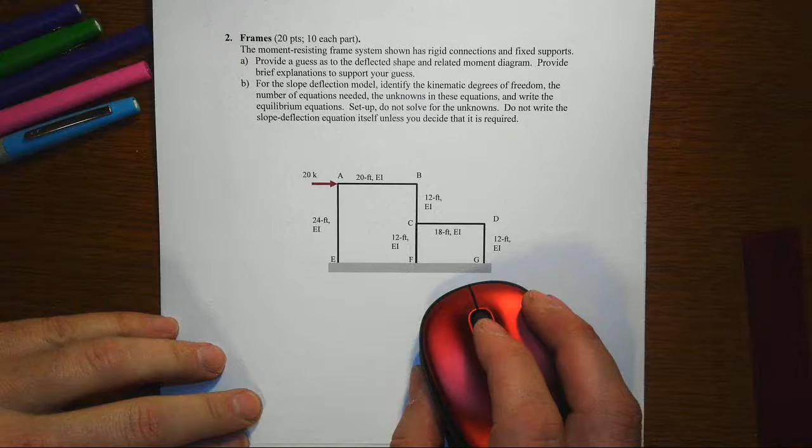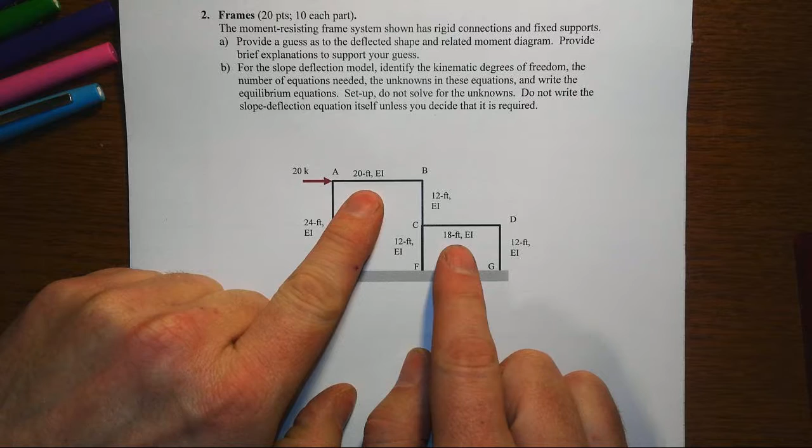In this item we've got a two-bay frame, but the stories are not the same height. We also notice that the beams are not at the same length, although they are the same EI, and the columns, of course, are of varying lengths. It turns out that the right half is about half of the left half panel here.

We get a lateral load of 20 kips, right? We have a moment resisting frame system, so all connections are rigid, and we do have fixed supports.

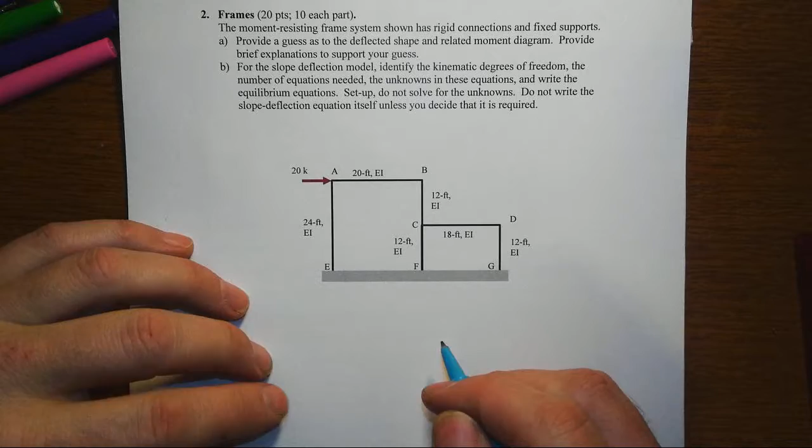We're asked to provide a guess as to the deflected shape and the related moment diagram, and provide brief explanations to support our guess. So let's start with the notion that as I push this frame to the right, the whole thing is going to want to sway to the right. That only makes sense.

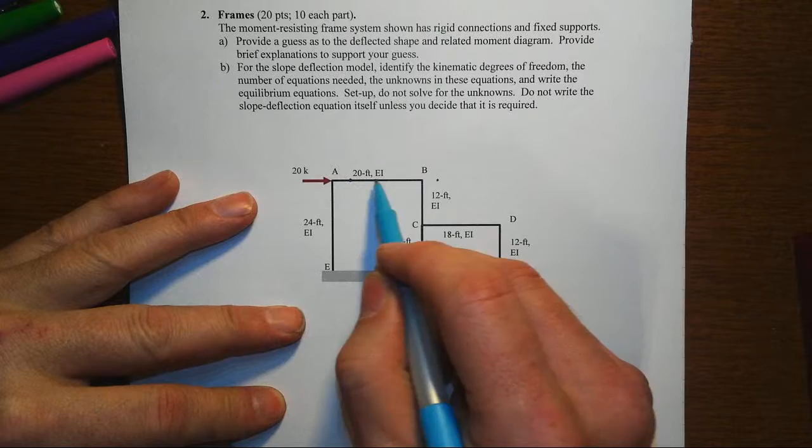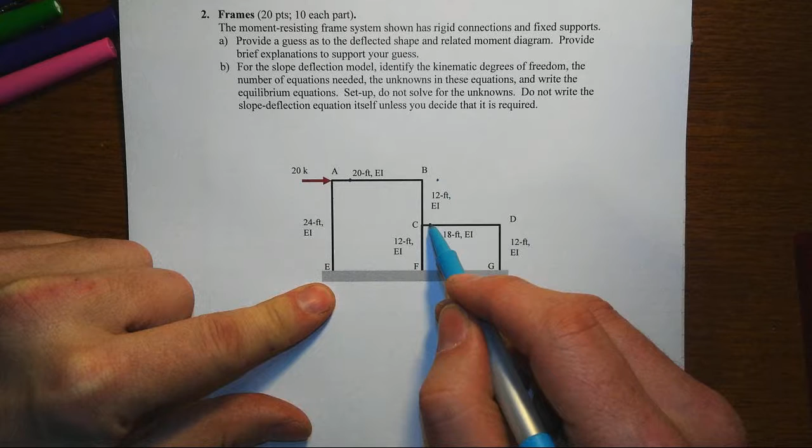We're not going to let the elongation of AB be anything other than 0. But when we look at this column BC, that CD part's going to want to go to the right too. I don't know how much that's going to go to the right, but it's going to want to move over to the right.

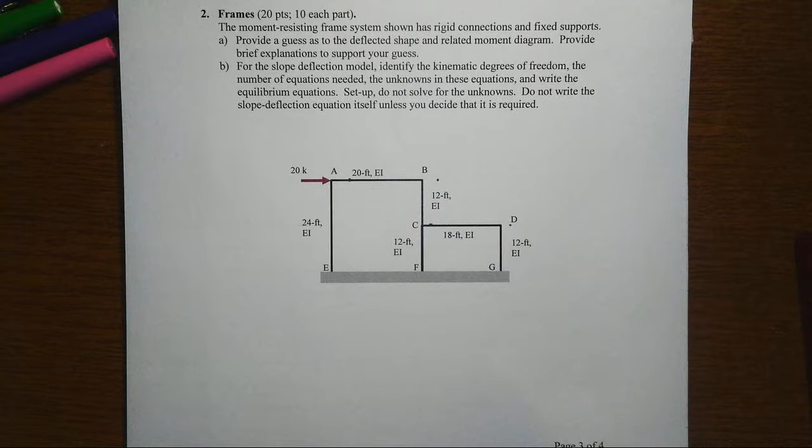And we're very used to that in this kind of response, we're going to get reverse curvature to pretty much everything, so that shouldn't change any.

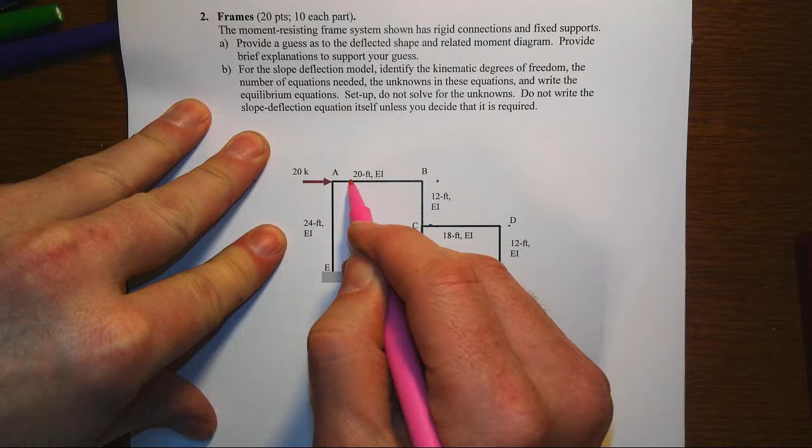Note that we've got, let's start with the beams here, and let's not make the rotations at the top of the beams too big. The inflection point will probably be roughly in the middle, and again, let's not make the beams go too much, but we get a little bit of an S shape there.

We're going to get S shapes in the columns too, so right angles remain right angles, so we're going to get an S shape in that big tall column, something like that.

Looks like I might have rotated joint A just a little bit too much, and same thing at B, it probably rotated it just a little too much. It's going to be hard to really get that S shape in there. Well, we get two S shapes, one for the top and the bottom half for that middle column.

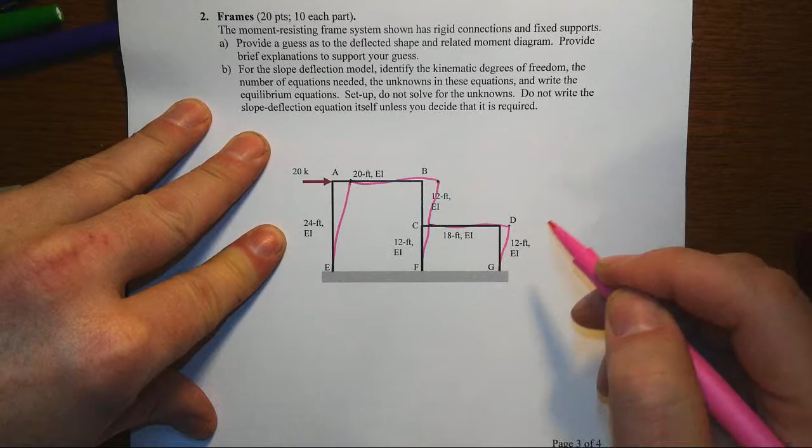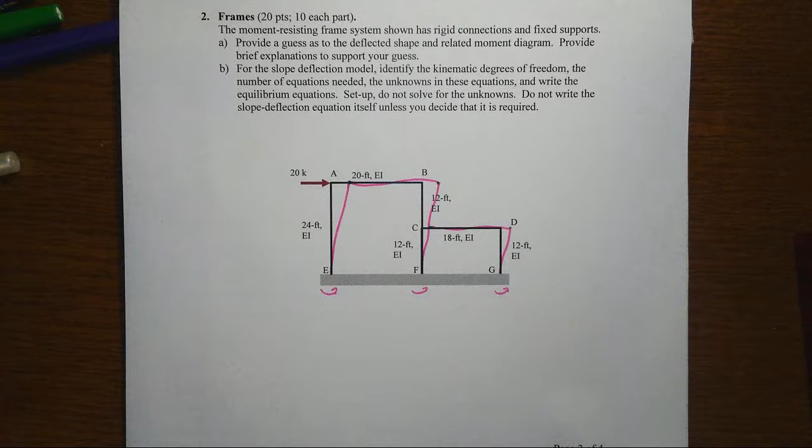And so that goes along with the resisting moments at the base, and then the reverse curvature that we have to have up at the top that goes along with the moment diagram, which I don't know if this will be convenient or not, but I'm going to superpose it right on top.

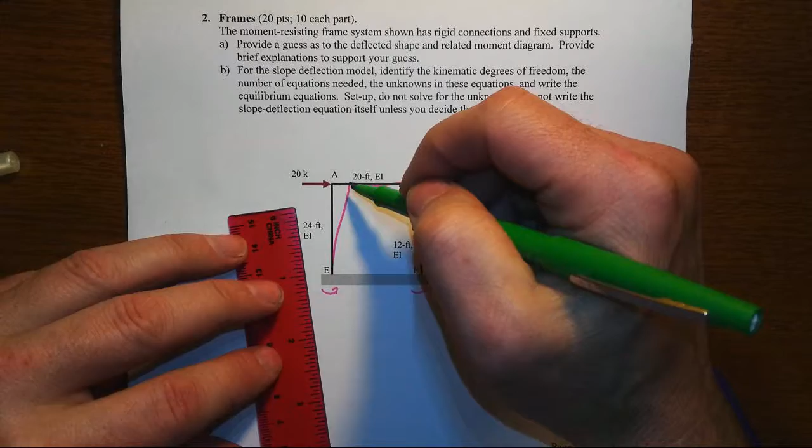We're going to get, if the top and bottom of the column AE had the same moment diagram, then same moments, the same end moments it is, I'd get a moment diagram that looked like that, inflection point about in the middle.

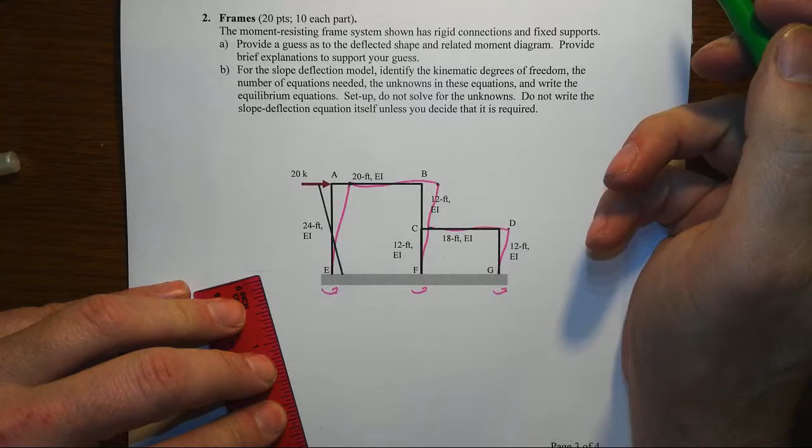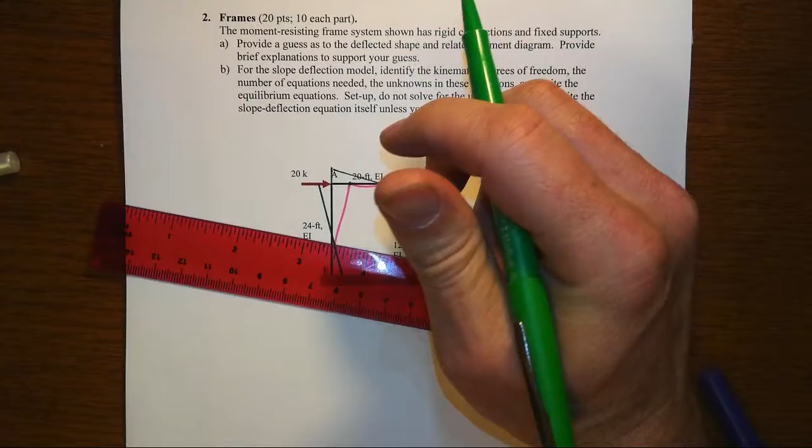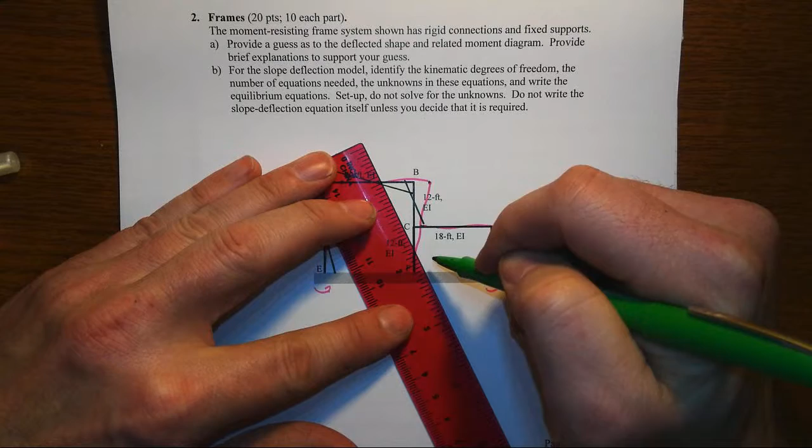Same thing in the beam. And then we get a microcosm of that for that little top half of column in the middle, that BC portion.

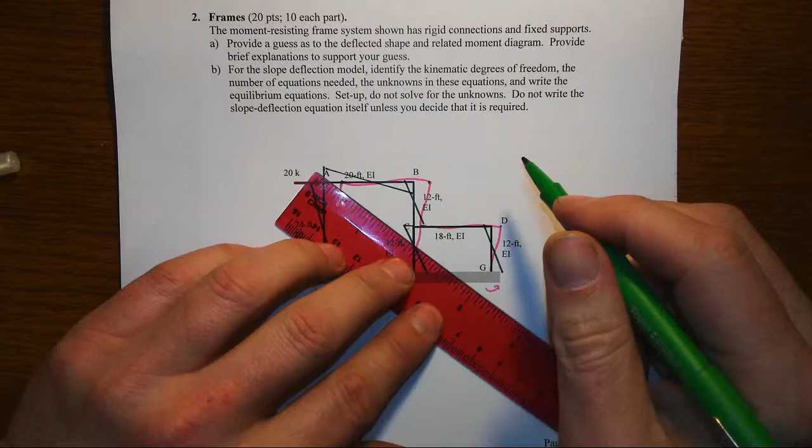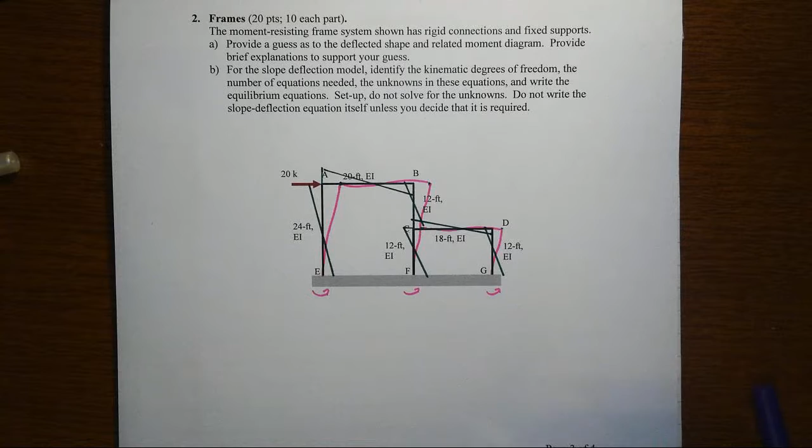CF will be something like this, and likewise then for the far right column, and then this middle will be a moment diagram that looks something like so, right? And all those are consistent with each other, right? So that's going to be the key thing.

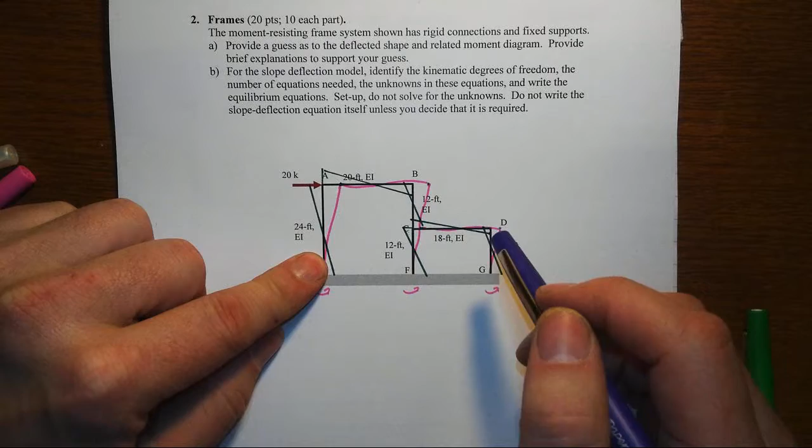I would use then my knowledge of moment diagrams and the point loads and the variations that have to be happening at the far ends to explain why the moment diagram has to have the shape that it does, as well as look at the equilibrium of the various joints to indicate that I have to have either moments that are equal and opposite to each other.

Or in the case of this T-junction, I have to have two of them going in one direction and one going in the other in order for that to be in equilibrium, to help explain that. And then you could use that moment diagram to explain the deflected shape, or you could use the deflected shape in your anticipation of it to reflect what you think the moment diagram is.

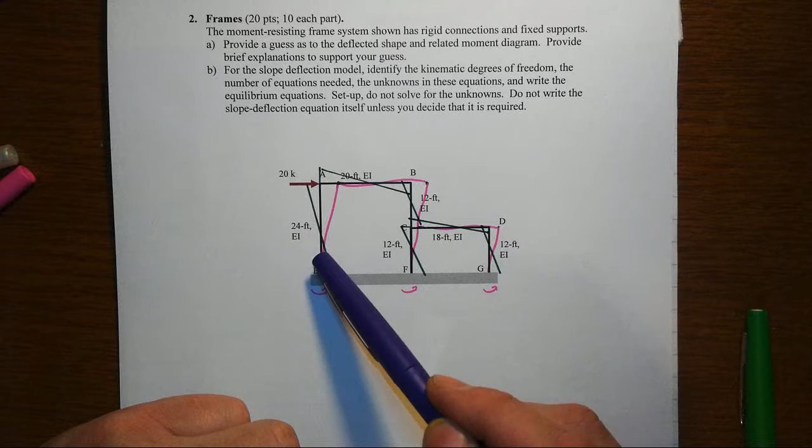That's how I sort of presented this, plus your knowledge of what has to happen with the point loads being where they are at the joint, yet we're having bending, so that's going to create the situation with sway that we've got for the moment diagrams.

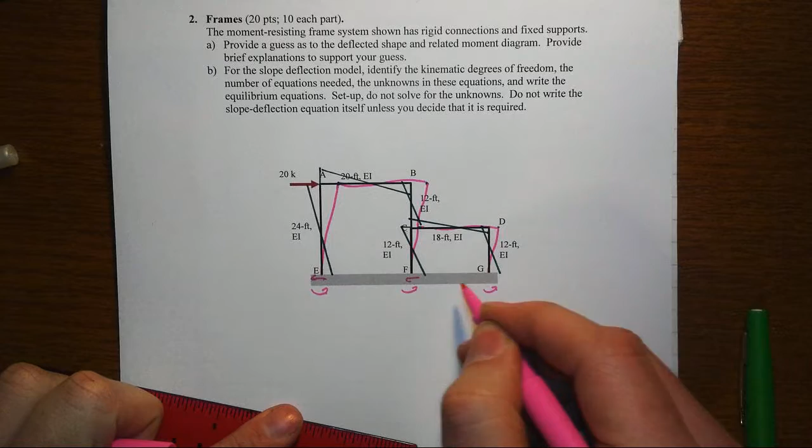All that is consistent, and I'd feel a lot better if we finished off some of our reactions here. The shears are going to be going in obvious directions, and then you've got the overturning from the axial forces.

And maybe that middle one is about 0. Not quite sure what happens with it, but it will be about 0 because it's sort of like at a neutral axis.

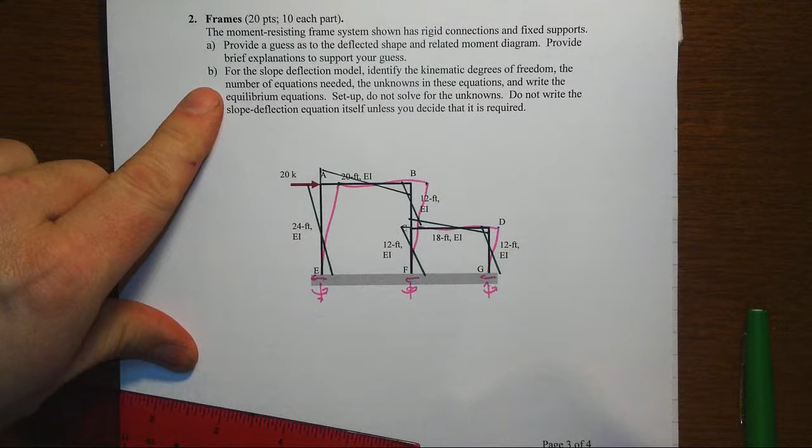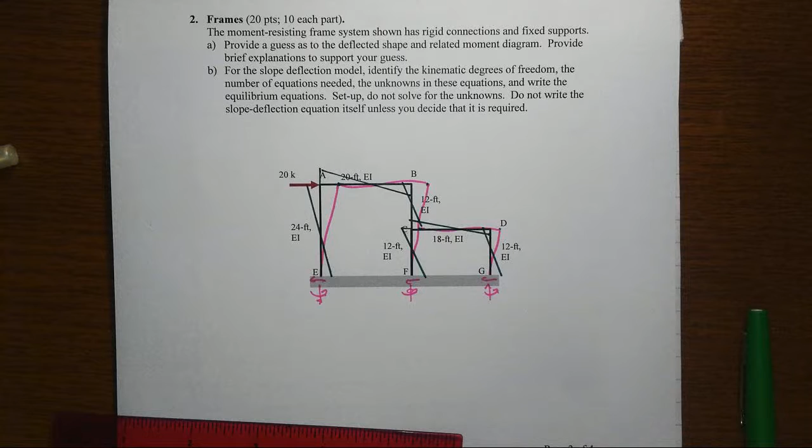We were asked, for part B, for the slope deflection model, to identify the kinematic degrees of freedom, the number of equations needed, the unknowns in these equations, and write the equilibrium equation setup. Do not solve for the unknowns, and don't write the slope deflection equation itself unless you really need it to figure out what's going on.

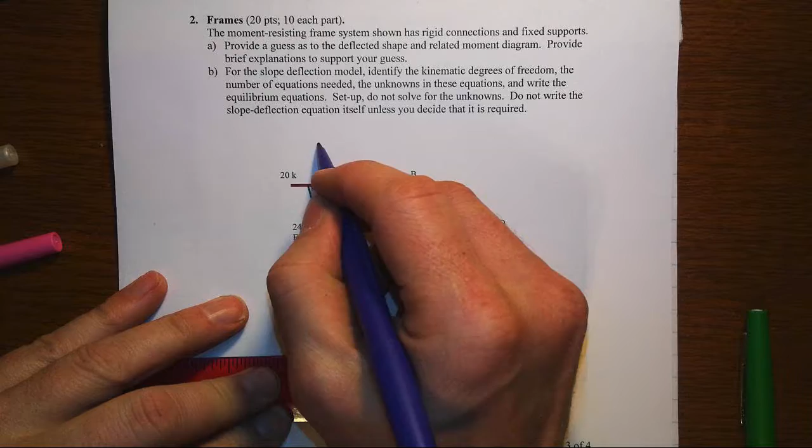We know that theta A, theta B, theta C, and theta D will not equal zero. So E, F, and G will be zero. So we have 4 kinematic degrees of freedom just from member end rotations.

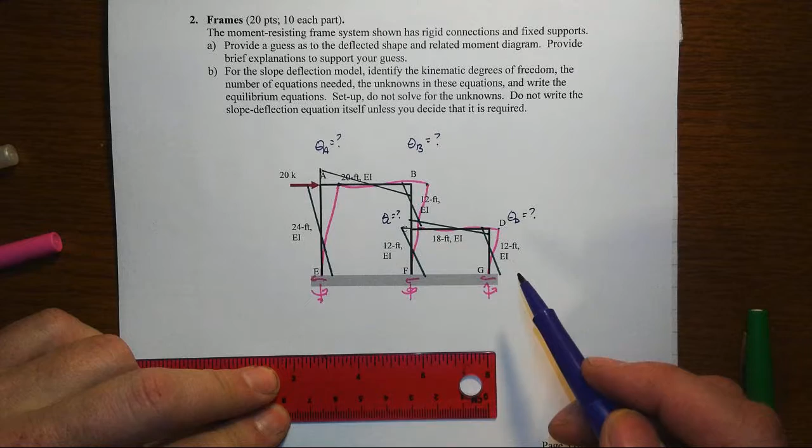Then we've got sway. Delta A will be one of those, but that's the same sway that happens at B, so that's just 1 - let's call that delta 1. Likewise, however much C moves over, we can call that delta 2. That's the same amount as what D moves over, so that's delta 2 as well.

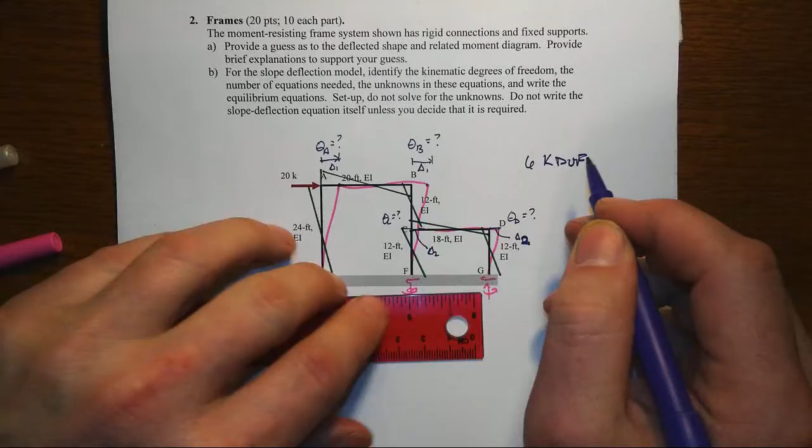If we know those two, then we know everything. So we've got 6 kinematic degrees of freedom: theta A, theta B, theta C, and theta D, and then all the chord rotation terms can be determined through delta 1 and delta 2 as our displacement degrees of freedom.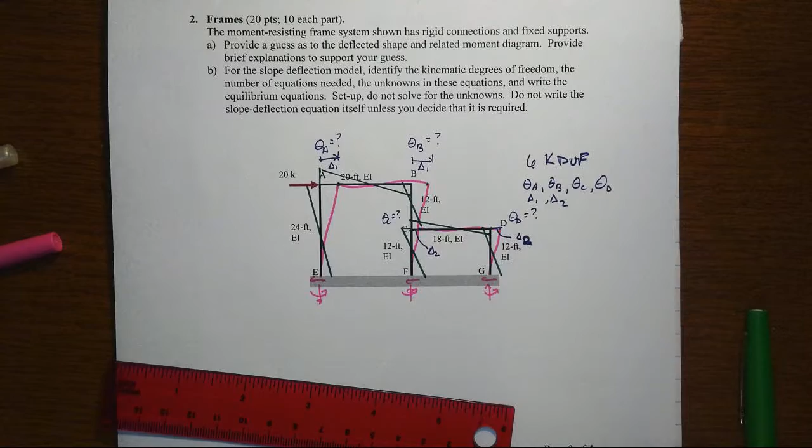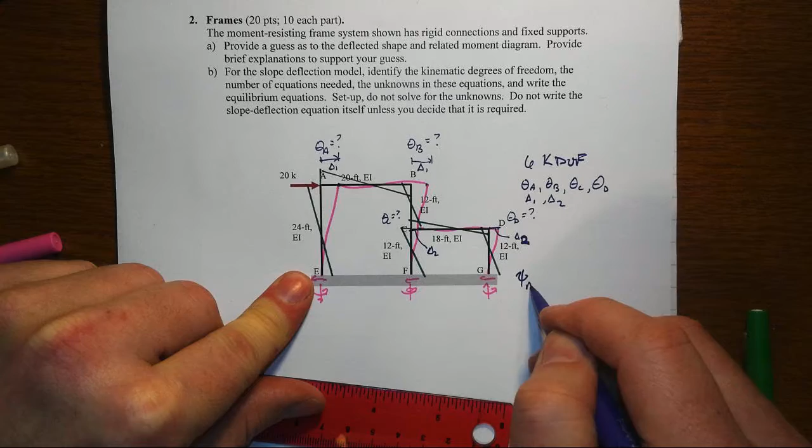Note, for instance, it's easy to think about psi AE being associated with delta 1 over this 24 feet - that would be one example. And we've got, for instance, psi CF, that's going to be equal to delta 2 over 12 feet.

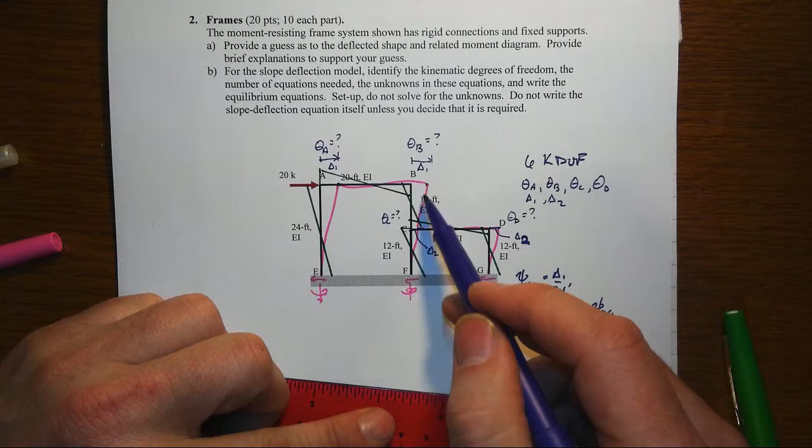That is the same as psi DG, but I haven't included the psi for BC yet, because we'll have to look at delta 1 minus delta 2 over that 12 feet to get to that one. That's a little bit more complicated, and it emphasizes that it's the story drift, the interstory drift, that matters for that column, not necessarily the raw displacement itself. So that's how those would be set up, and why we end up with only 6 kinematic degrees of freedom here.

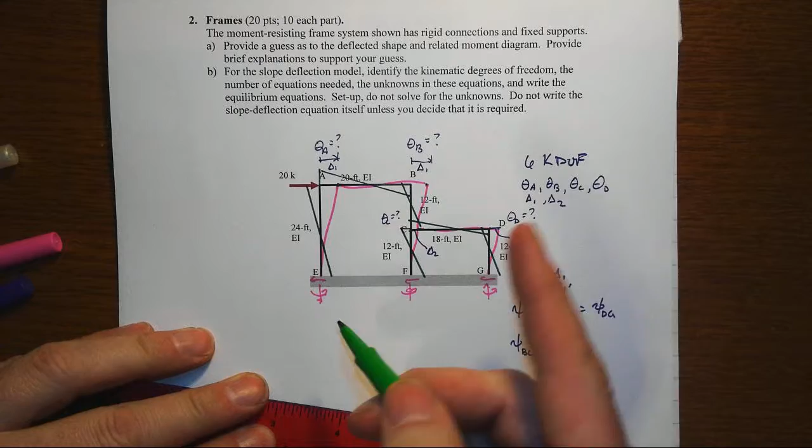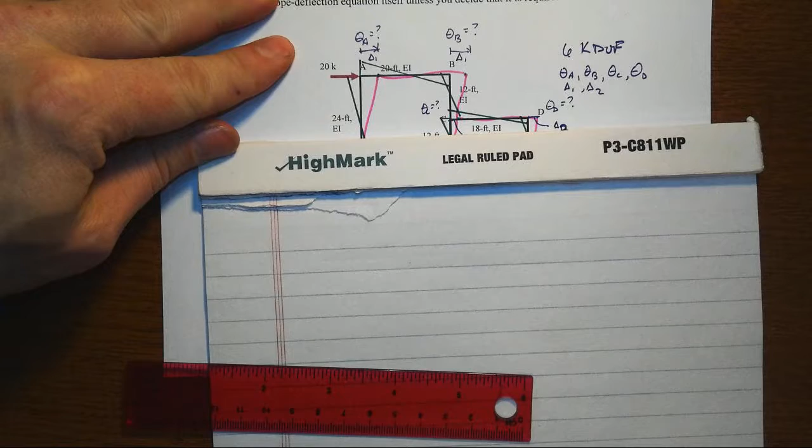Now the equations that we need are going to be one for each, and they're equilibrium equations. What's going to happen is we'll go to each of the associated joints. I'm going to go to another sheet of paper here to begin to write this out, and keep that portion, the drawing, available to us.

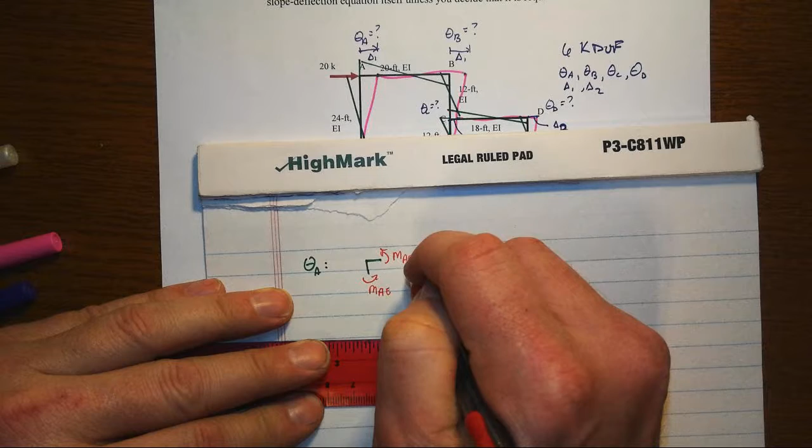So we would go to the first kinematic degree of freedom, theta A, and we have just those two members that frame in, MAE and MAB, and our equation would just be MAB plus MAE equals 0.

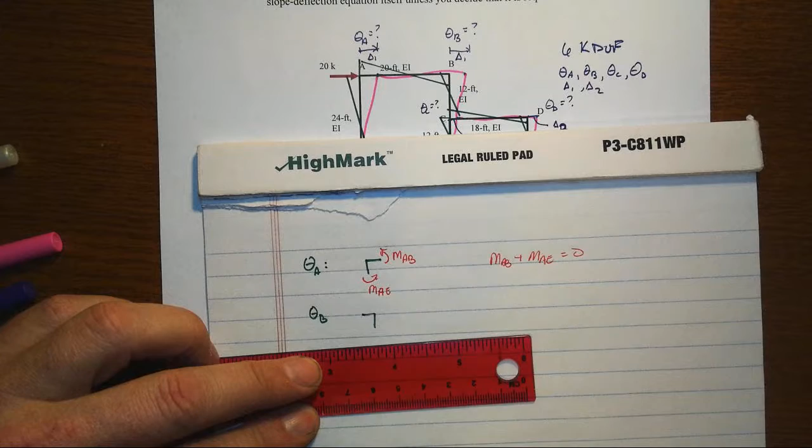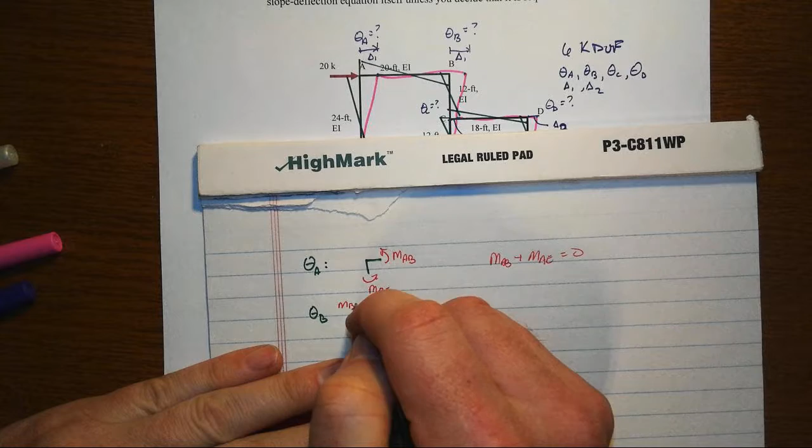Then we go to joint B, have a similar setup there for all the members framing into that joint. And of course the equation would be MBA plus MBC equal to 0.

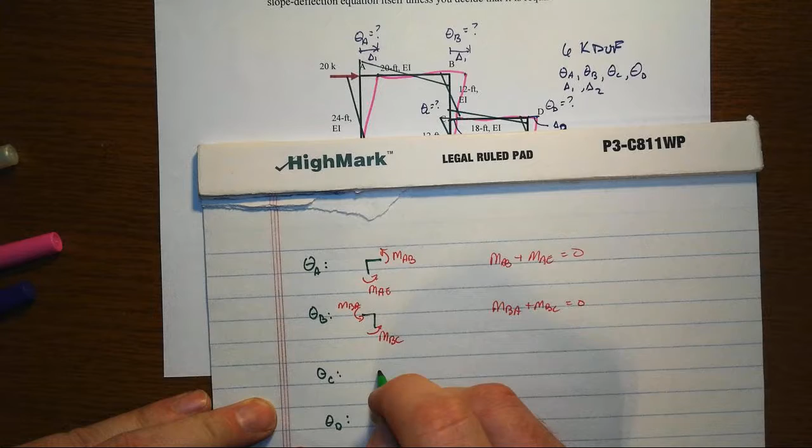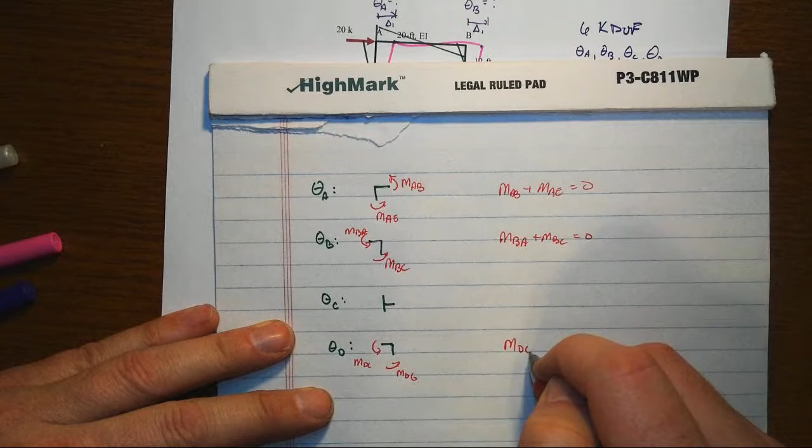We get 2 more rotational degrees of freedom to work with, theta C and theta D. Let's go ahead and begin to get that written out - there's the stems of those. I'm going to do the simplest one last: there's your MDC and your MDG, simpler because it only has 2 terms in it.

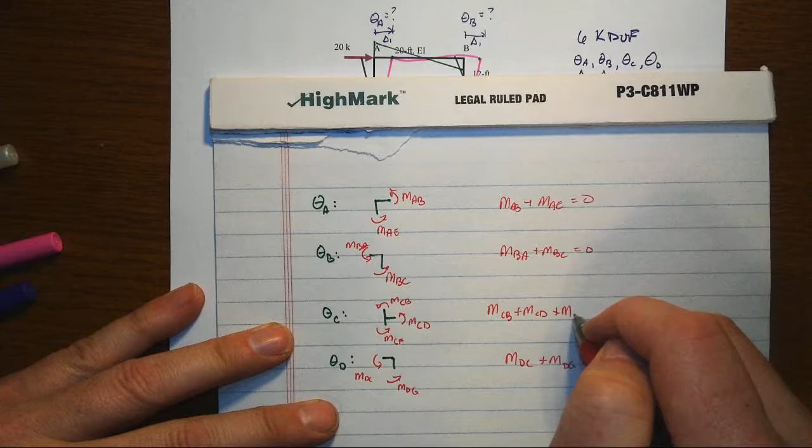But now let's go to this middle one. We've got MCB, we've got MCF, and then MCD. Remember, we're doing this in terms of the positive sign convention that we've established. So there's our 4 equations of equilibrium, all associated with just the joint rotations, those kinematic degrees of freedom that are the joint rotations.

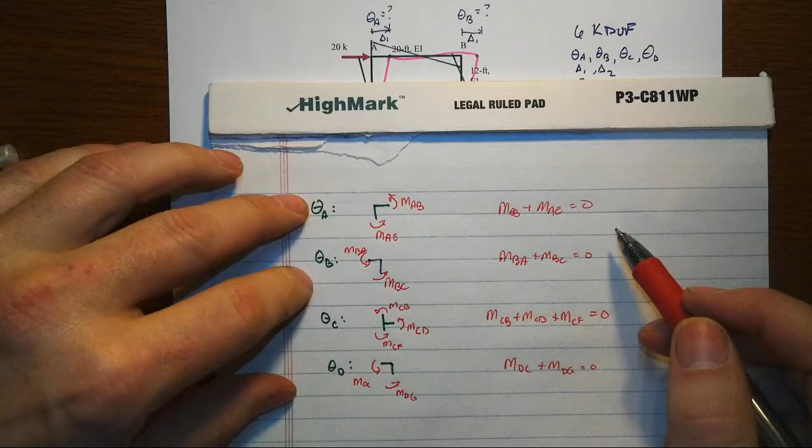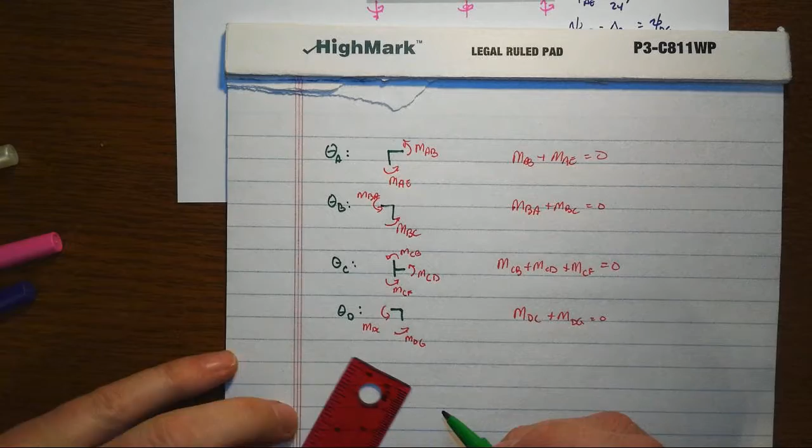But now we've got to go get the equilibrium equations associated with sway. This is a lot trickier, right? Probably going to take us a lot more work to deal with this. One thing I might think about is I want it in terms of member end moments.

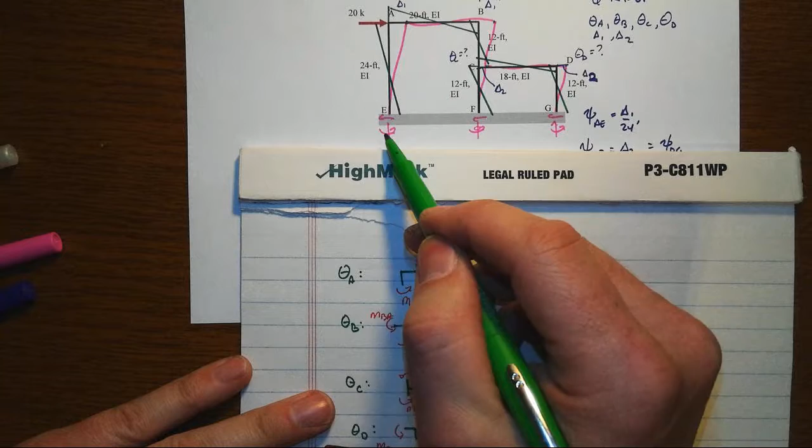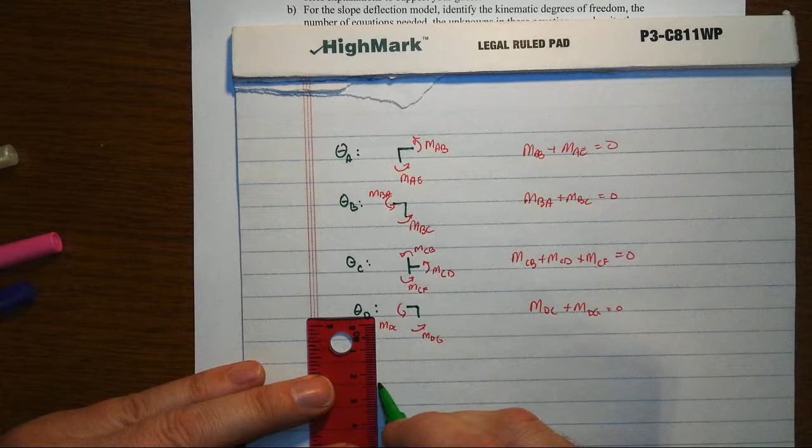So if I knew something going on here, here, and here, those member end moments, that might be helpful. We've got those shears involved. So one thing I might do is start with just looking at the various columns that we've got going on here - there's that one, A at the top, E at the bottom.

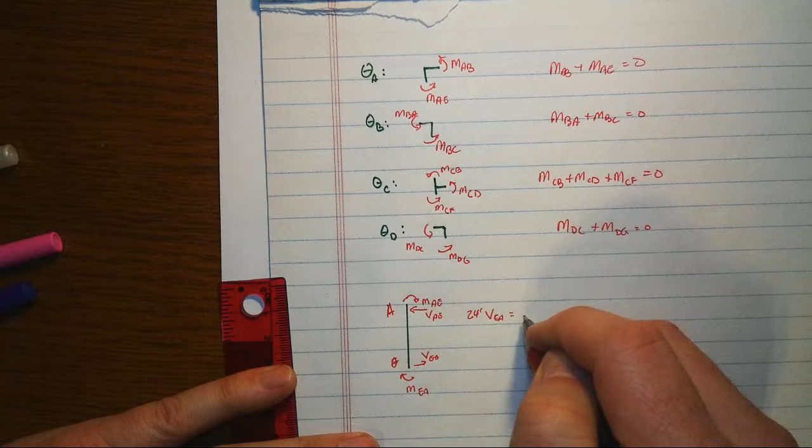We've got clockwise positive on the member end, so there's your MEA and MAE, and there's the shears that will go along with this. From that I know that VEA times 24 feet is equal to MAE plus MEA. So that's part of it - only part of it though. We go over and get the short column CF, and again clockwise on the member end.

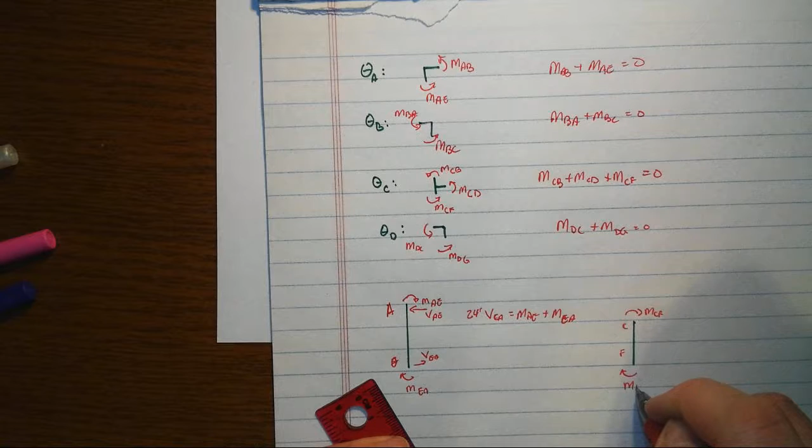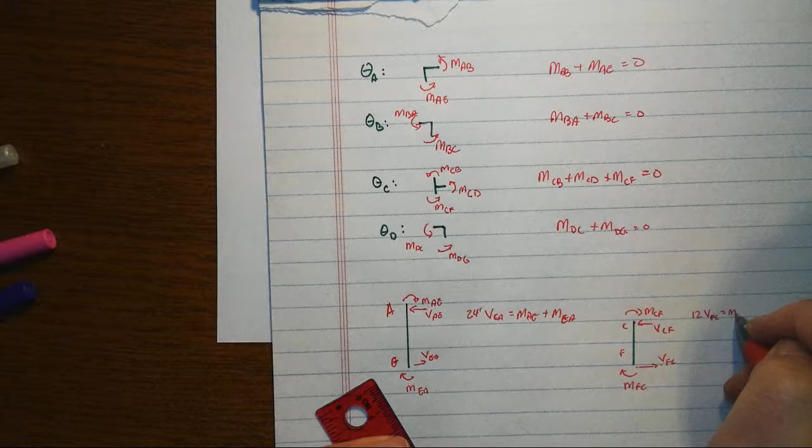And so for VCF, VFC, that makes 12 times VFC equal to MCF plus MFC.

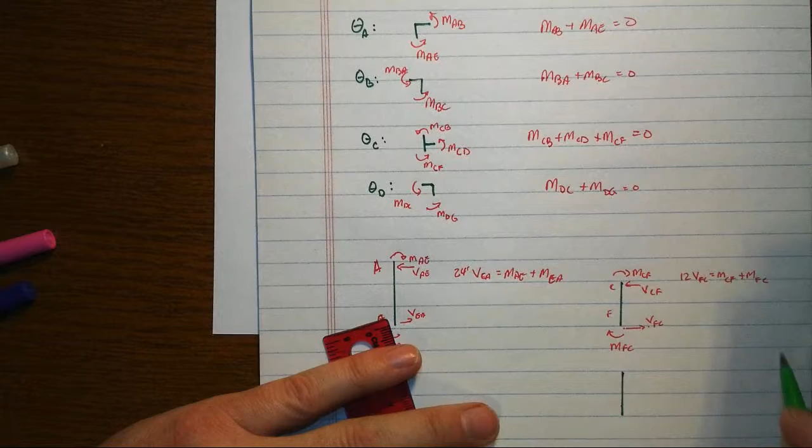Alright, and then there's one more of these, the far right column. We think we're just playing with this, we have to see how this is all going to work out. This would be MDG and MGD, again, plop those in there. VGD, VDG, and VGD is going to be 12 VGD is equal to the sum of that MDG plus MGD.

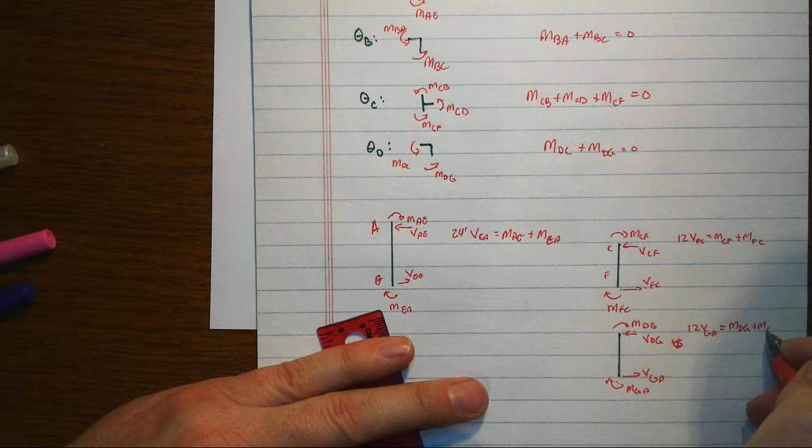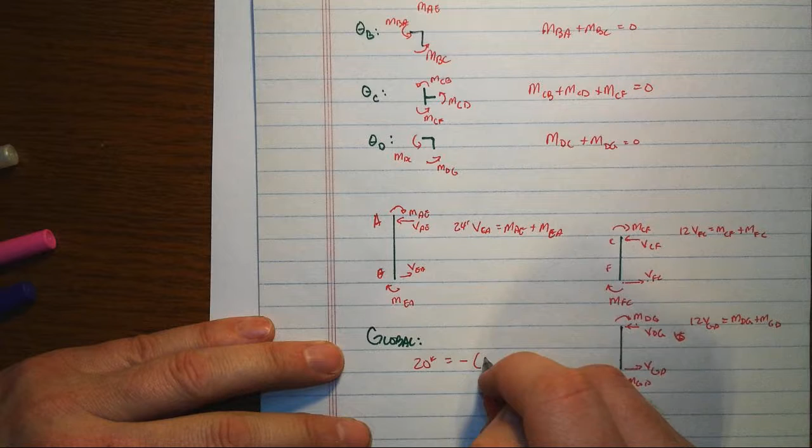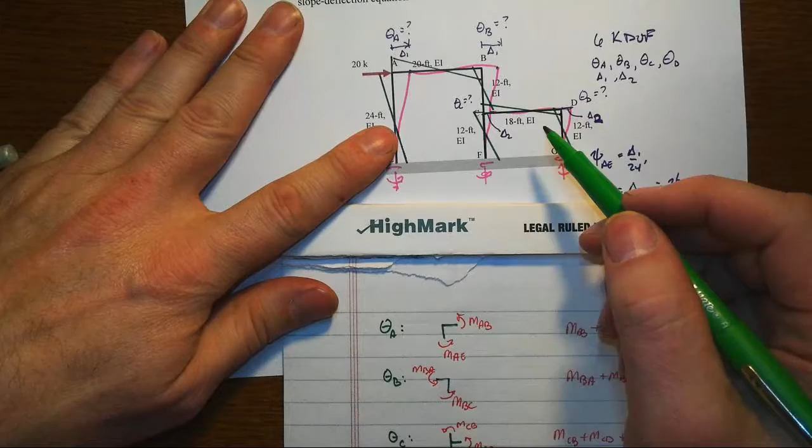Why the heck do I care about that? Well, from the global equilibrium, the way I've got this set up, all these shears are going to the right, so 20 kips is going to be equal to the opposite of each of these, VEA plus VFC plus VGD, of which then I've got all these little pieces that will feed into that. Alright, well that's okay, because I got one equation now in terms of all of those, but I need one more in here because I got delta 1 and delta 2 involved. So I got to do one more thing in here to somehow get that other sway involved. I've used that column, I've used that one and that one, but I've not done anything with this one right here. So that's kind of interesting.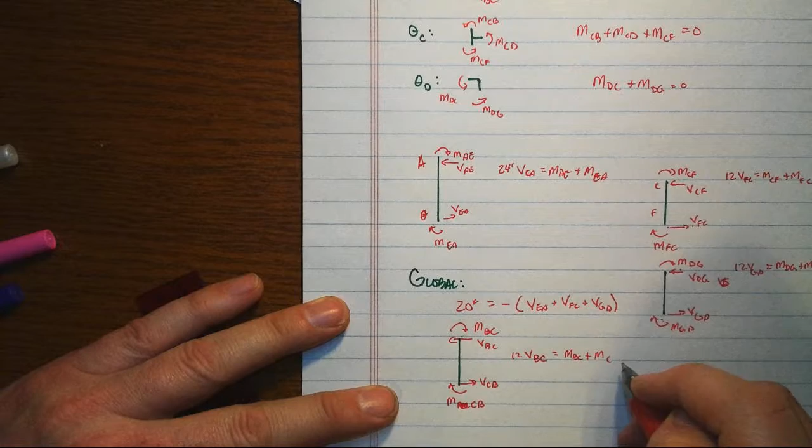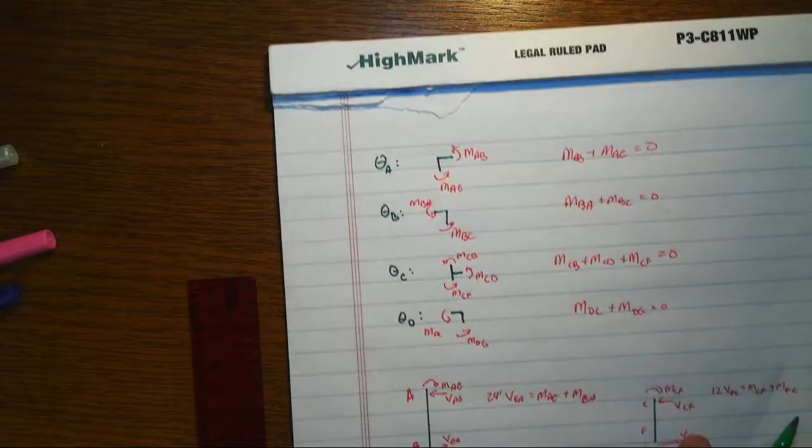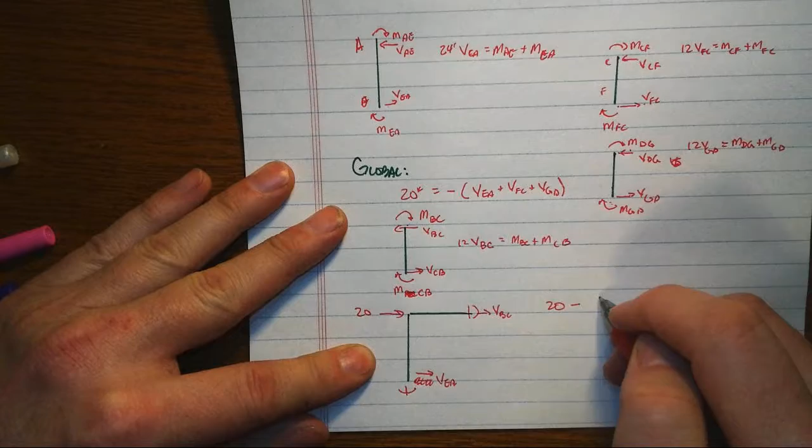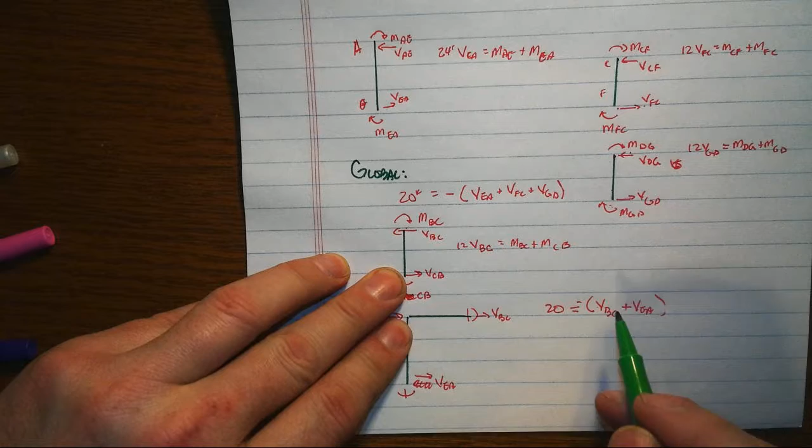And if I go back here, and maybe if I just do that portion of the free body, I'm just kind of making this up here, trying to figure out something that might turn out to be useful, playing around with various ideas. And we've got there for that one, there's your 20 that we applied. We've got then, this is EA, of course we have an axial force and the bending moment there. And over here we've got a shear that, let's see here, that's got to be going in the, VEA was shown going that way, and so VBC also, by the time we flip it around from here over to this side, is going to look like that. Of course, again, a moment and another value there, but notice again, now we get 20 minus, or equal, sorry, a minus VBC plus VEA. That's a different equation than we had before, and because we have VBC now in terms of member moments and VEA in terms of member moments, we've got an independent equation, and so that's where we'll get our equation 5 and our equation 6 from.

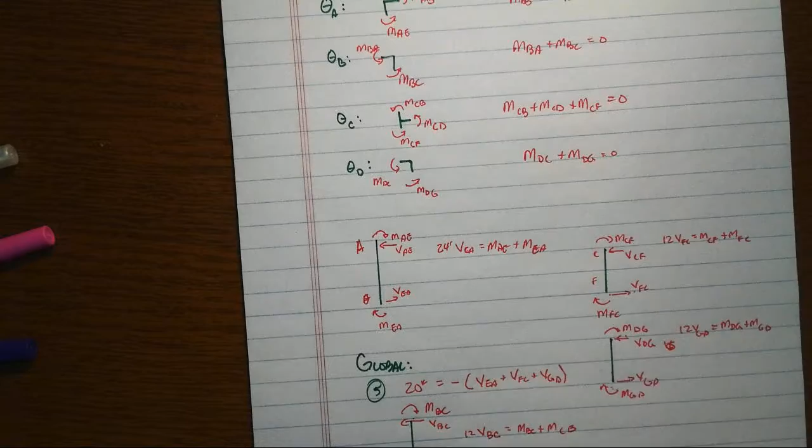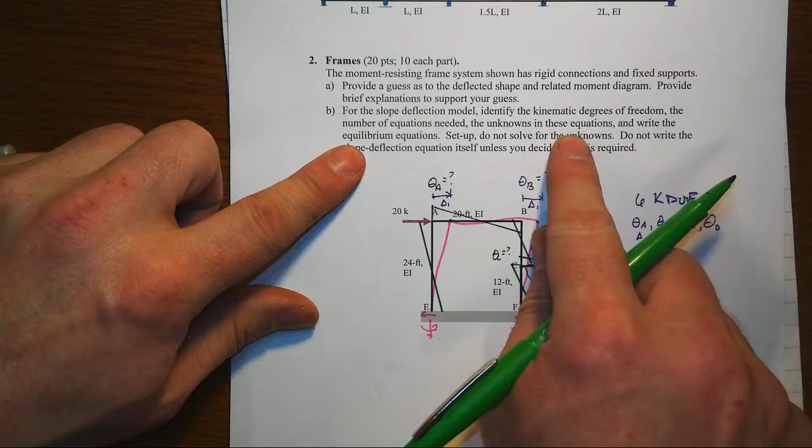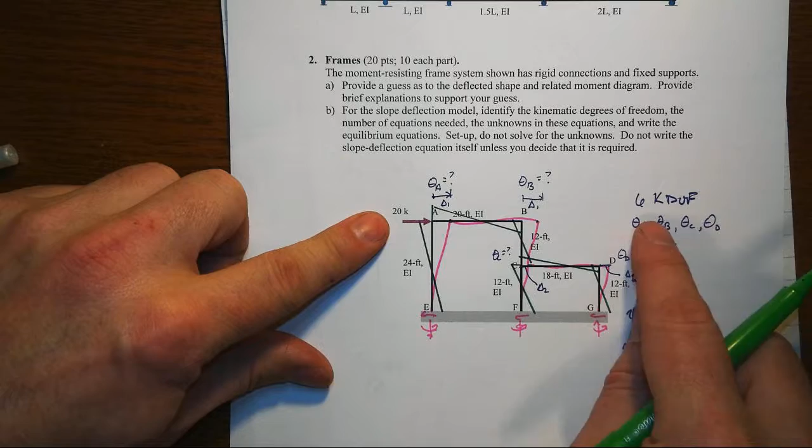That will help us to do what we want for the slope deflection method. So let's make sure here that we've gotten everything that's been requested. We provided a guess, we provided an explanation, slope deflection method, identify the kinematic degrees of freedom over here. The number of equations needed, we need 6. The unknowns in these equations are these right here, so they're equilibrium equations in the unknowns, which are the member end rotations and the general sway terms. Set up, do not solve for the unknowns, which is what we've done with those equilibrium equations.

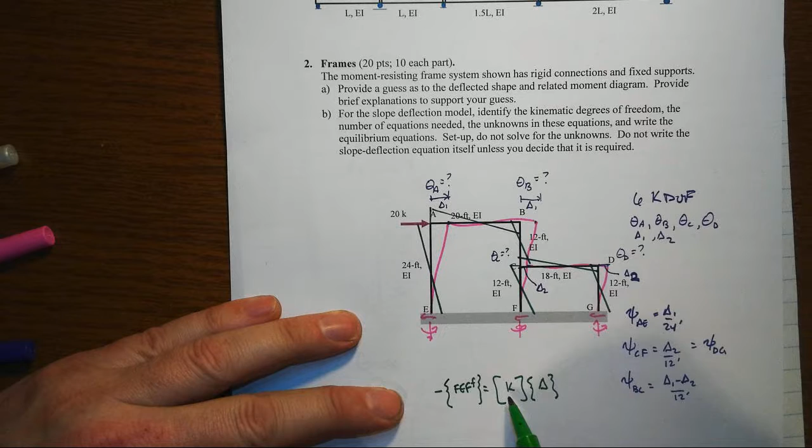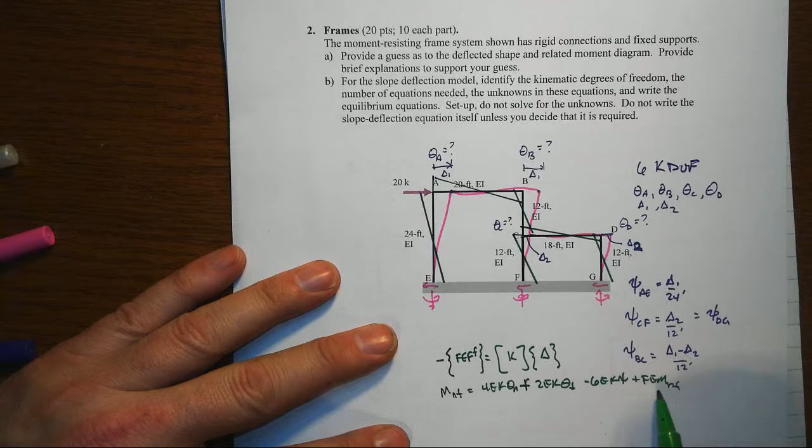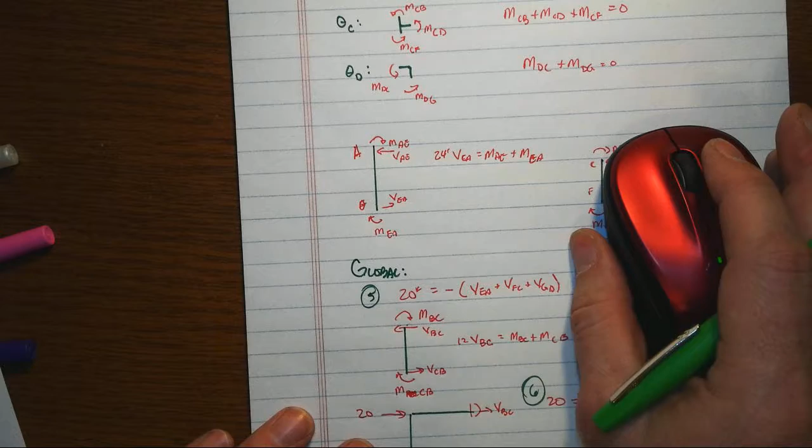We've written those. We can generally write that ultimately as these will be, what would they be? They would be the equivalent fixed end forces and moments are going to be equal to some stiffness matrix times this vector of all of these right here. These stiffness coefficients, these KIJs, are going to come from looking at accumulating all that slope deflection mess. So we have MNF is equal to 4EK theta near plus 2EK theta far minus the 6EK psi terms plus the fixed end moment terms. And so a lot of these here, those fixed end moment terms are going to accumulate and go into here, but coming from these sway equations, we're going to get some other effects in here. So that's why I generally call this the fixed end forces terms, and then all get substituted in, and away we go. We'll solve for those unknown member end displacements, equilibrium equations in the unknown member end displacements.